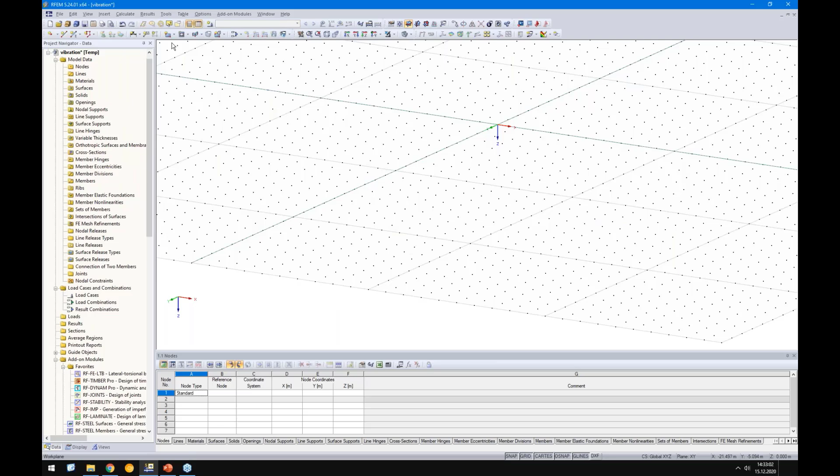Let's start with the timber. I will create a new material. Watch out, they used 10,000 Newton per square millimeter, not 11,000 as C24, but in this case we can simply use a C22, which should have 10,000 Newton per square millimeter.

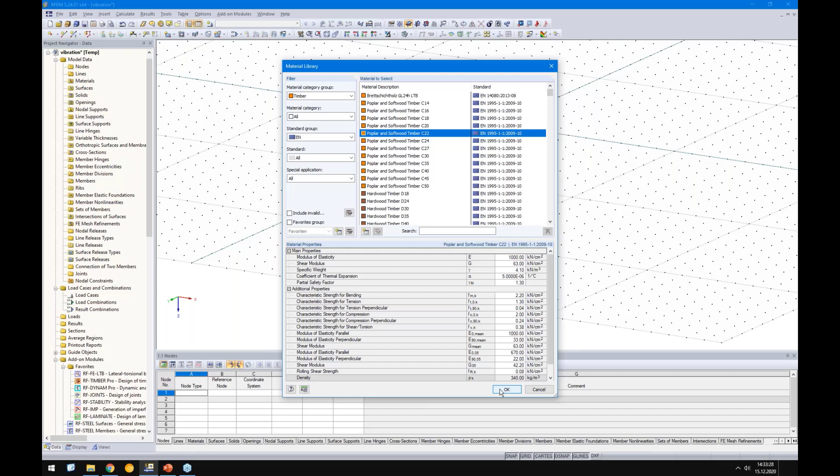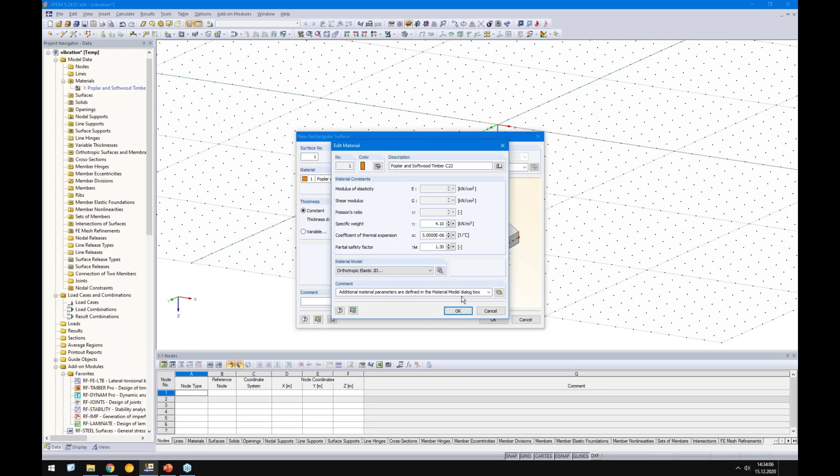Then I click OK, and we have the height of the timber is 200 millimeters and the concrete is 100 millimeters. So I will enter 200 millimeters, and of course that's still an orthotropic surface, otherwise I will get an error message during the analysis. You see here we have the X direction with a strong E-modulus and the weak one in the Y direction. In this example we can directly set it to 0, because in the hand calculation from the source, no stiffness was considered from timber. There's a tiny stiffness, but of course not much. All right, so it's an orthotropic surface with 200 millimeters.

So it has 8 by 12 meters. Let's double check, 12 meters and 8 meters. Then I will copy this surface.

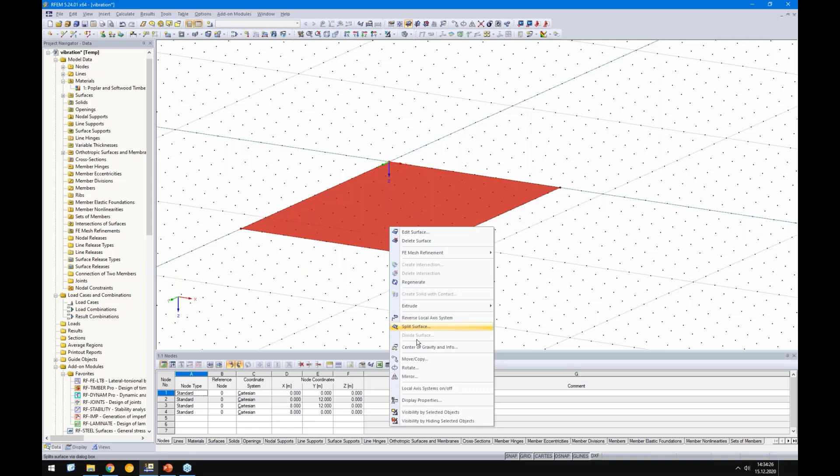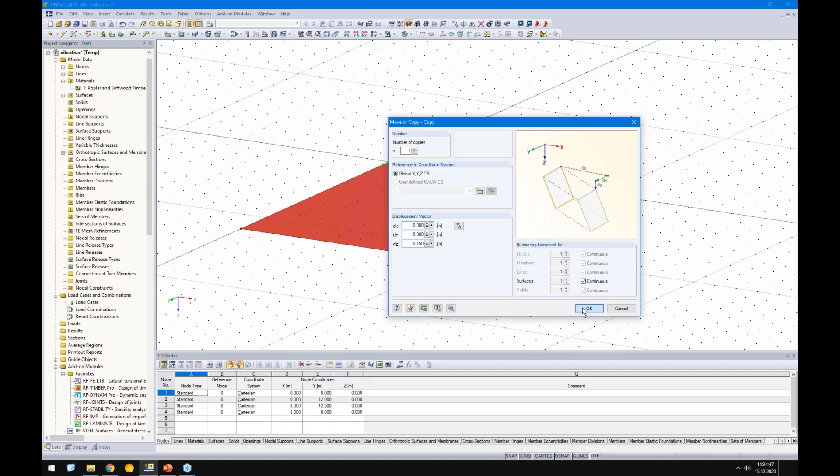And I will create a concrete. So the thickness was 20 centimeters and 10 centimeters, meaning we need to lift up this concrete surface by 0.15 meters from center to center.

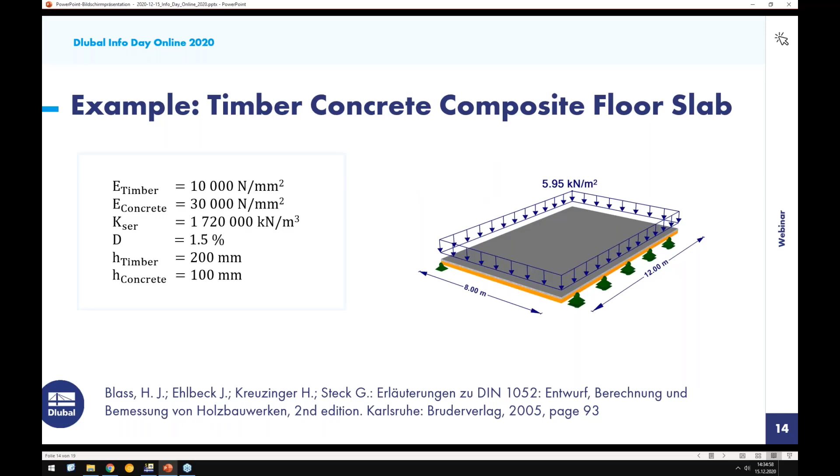So we need a new material here. Let's check, they used 30,000 Newton per square millimeter, so we should use a concrete with 30,000, too, it's a C20/25. But it has only 100 millimeters, of course, so we will switch this to 100 millimeters.

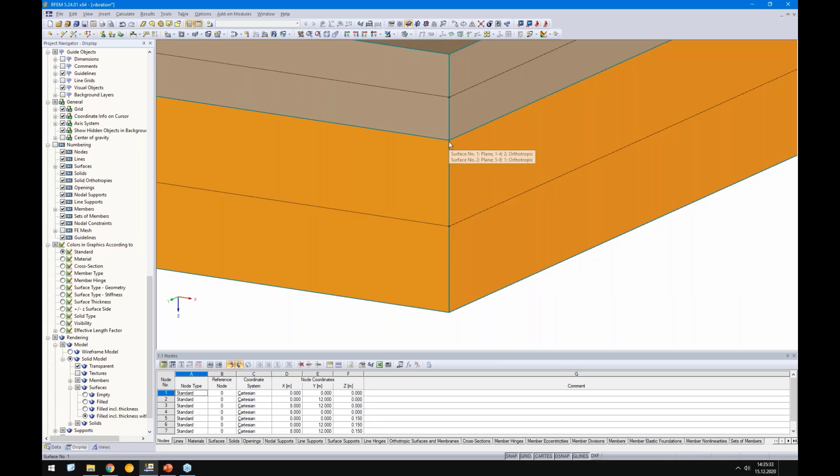Afterwards, let's check if everything is correct. We activate the thickness for the surfaces. When we zoom in, we see directly, okay, so this is the concrete from here till here, and from here till here the timber, which looks fine.

So what we need to do now is connect the concrete slab with the timber slab. What possibilities do we have - I will show two examples. So we have two ways to do this. The first way, I start with a contact solid, so I select these two surfaces and say create solid with contact.

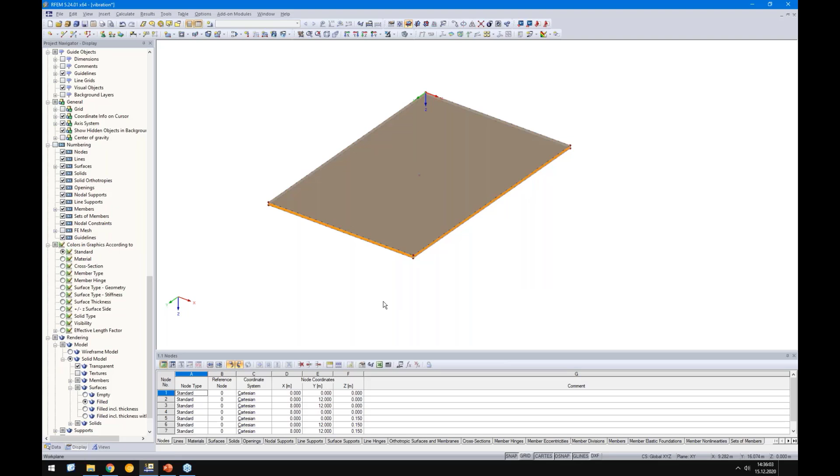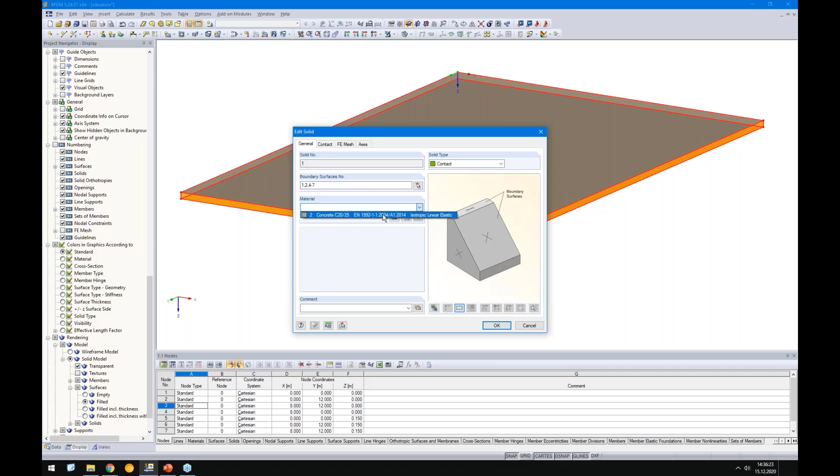You see directly we get some boundary surfaces. These boundary surfaces have zero stiffness because they get the stiffness from the contact solid. We will define this contact solid, and we select the contact - it's the contact surfaces, so surface 1 and surface 2.

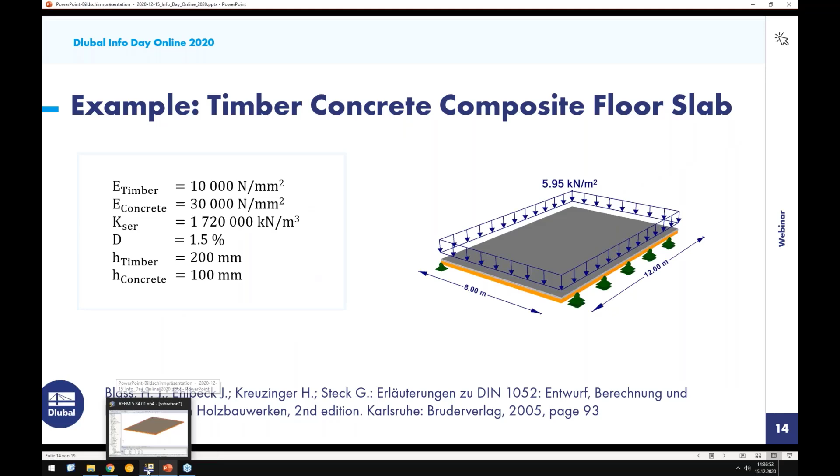Perpendicular to the surface, we want to consider full force transmission, and here parallel to the layers, we want to consider this elastic behavior, and the spring was 1720 meganewton per cubic meter, and this value we will enter here. So we are in kilonewton, so I will add 3 zeros. Okay, that's it so far.

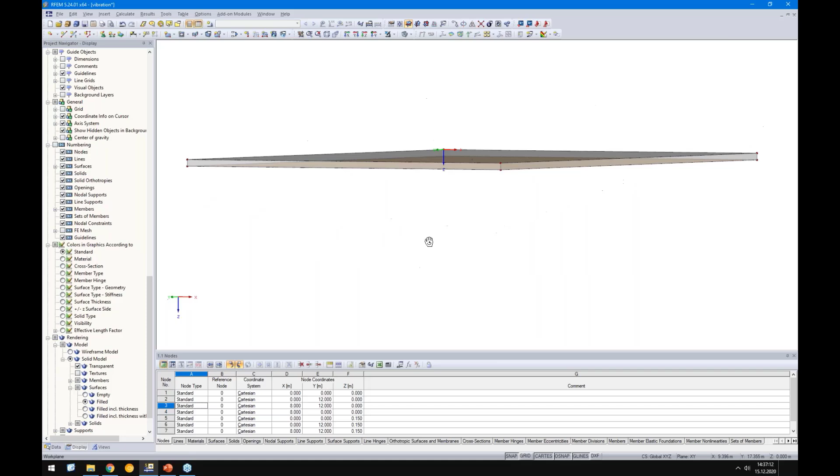Let's double check. On top we have this concrete - maybe better to select standard here. And on the bottom side, we should have this timber. Okay, good so far?

We will support the slab. It's simply supported on this side and on this side. In the X direction, I will also consider a tiny spring to keep it stable, otherwise there is no support in the XY plane. With the springs I fix this structure, but since we do not use any load in the XY plane, we use only the mass in the Z direction, perpendicular to the surfaces.

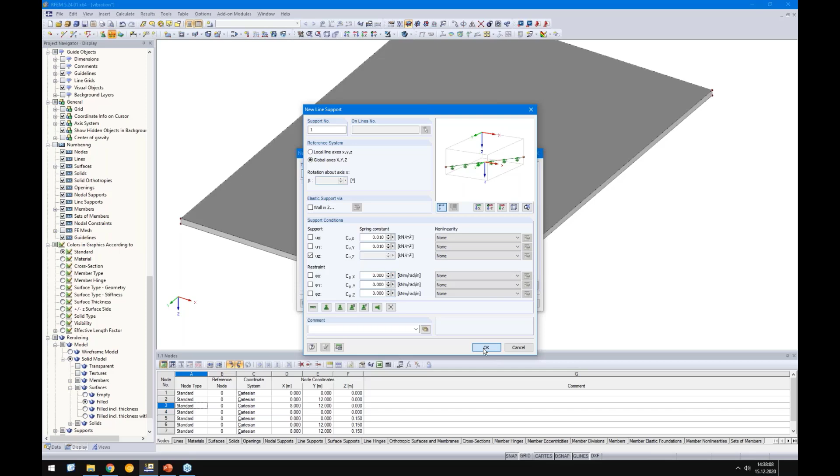So this line and this line. I will add a load case, load case 1, that should be the mass. The self-weight is already included in this 5.95 kilonewton per square meter, so I define here directly the force of 5.95 kilonewton per square meter.

And let's take care of the FE mesh size. So maybe we will switch to 0.2 meters, which should be absolutely fine for this example. All right, that's one option. I will show you the second one.

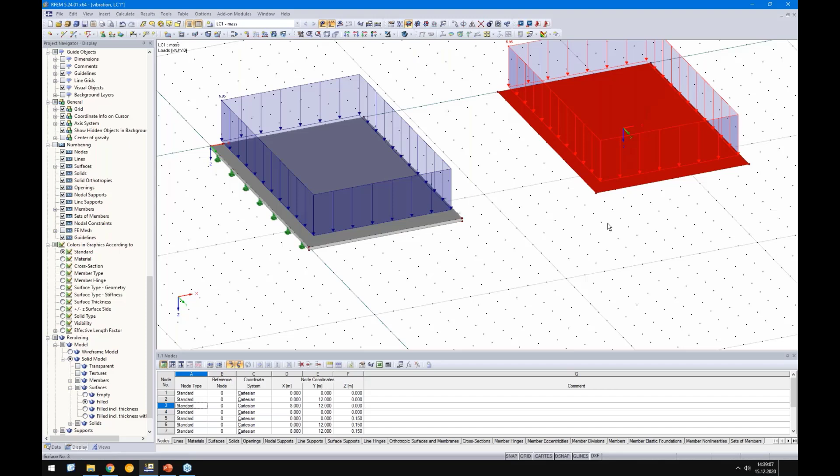For the second one, I will copy the surface via drag and drop, and in this case I will use the element surface releases. I will create a new surface release. I want to release another surface. So you see here how it works: we have one solid or surface and another solid or surface, and in between there should be this hinge information, this release information.

Here you see we have an advantage because we can control both directions independently. With the contact solid, there is only one direction, so X and Y are always the same value. Here we can distinguish, but to compare the results, I will use the same as for the contact solid.

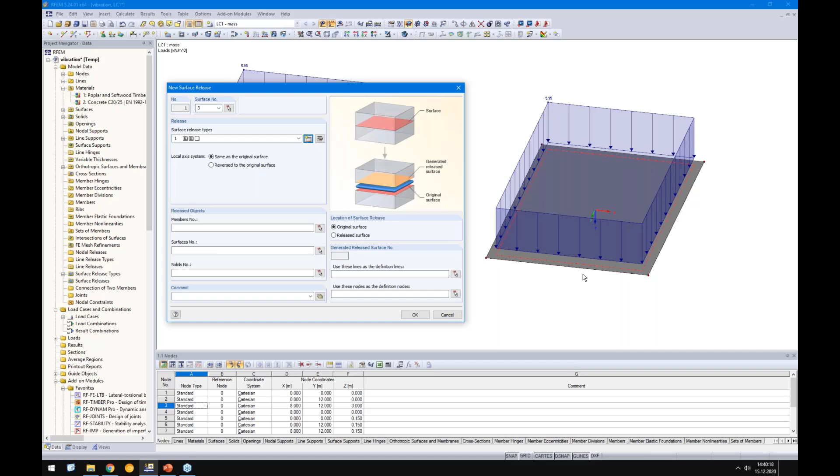I can release the object here, the same as I did with the line releases, but there is no element yet to release, though it doesn't matter. I just click the OK button, and when I click on the surface, you see there is already a surface, and this surface I will add. It's a zero surface, but no big deal.

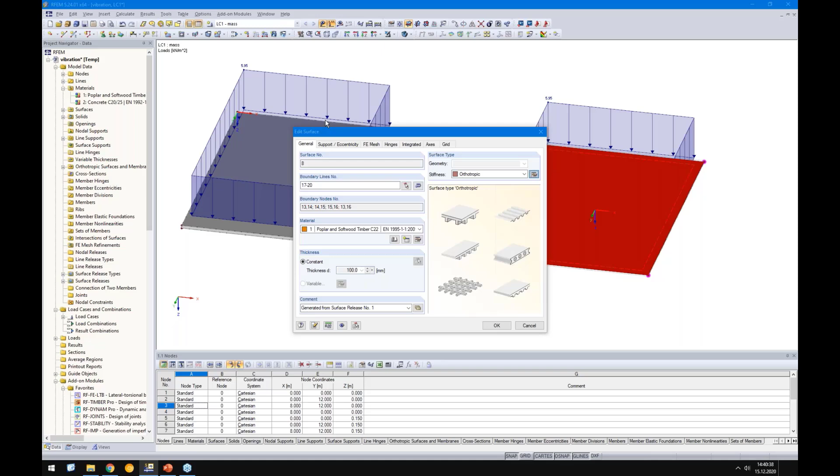I will switch over to orthotropic and assign this timber surface. I just need to adjust the thickness of the timber by 100 millimeters. And now I need to set this concrete surface, or create an eccentricity for this concrete surface by minus 150 millimeters.

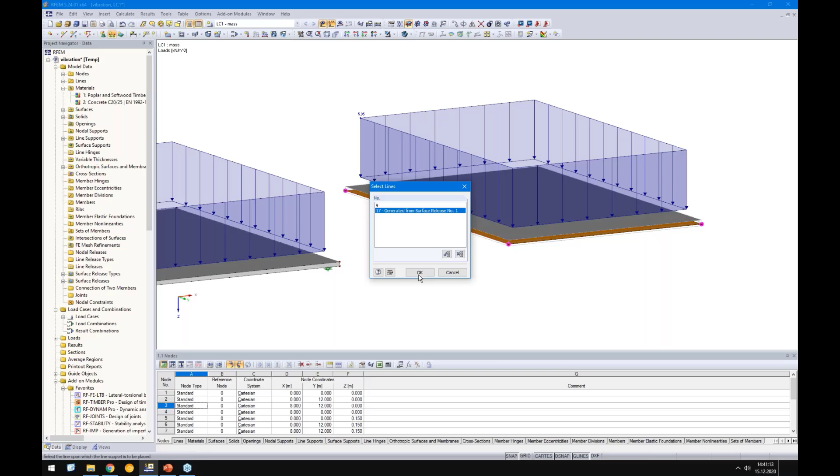Now I have the same model - oh, not the same, I forgot the supports, so on the left side and also on the right side. Okay, let's run the analysis for load case 1.

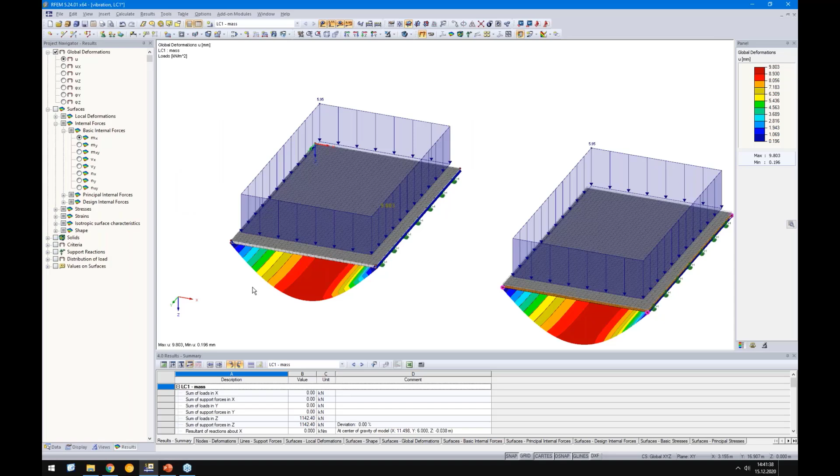Meanwhile we check what is the solution from the analytical equation. From the example it is 9.5 millimeters. Let's go back and see the result. It's good, but still a bit away from the 9.5 millimeters. But you can see it here in the center, we already have the 9.5 millimeters, but not here on the outside.

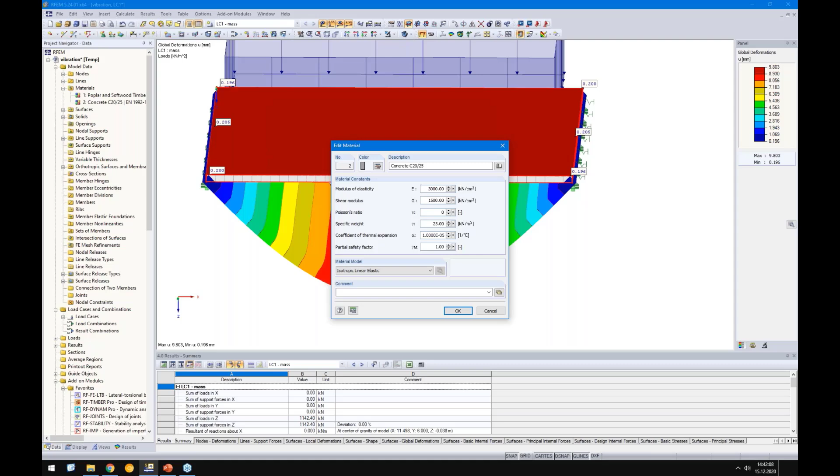This comes because of the concrete and the Poisson effect. Of course, in the hand calculation or analytical equations, this Poisson effect is not considered, so I will neglect it here too. I set it to 0.

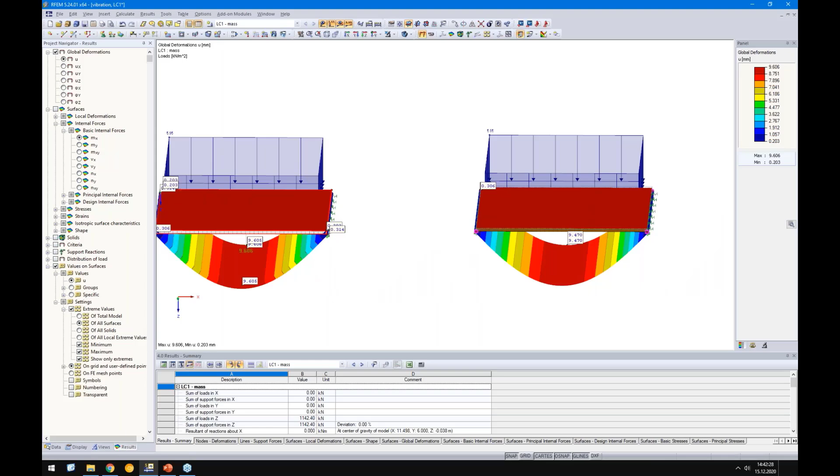Start again. So we had 9.5 millimeters, we have 9.6 now here, and we have 9.47 on the right side with the surface releases. So it fits perfectly with the result from the analytical equation.

So it's bigger than 6 millimeters, and therefore the eigenfrequency of this structure is lower than 7.2 hertz. This was the limit in the old German timber code, and the new limit in the Eurocode is 8 hertz. But there is always a relation between the deformation and the eigenfrequency.

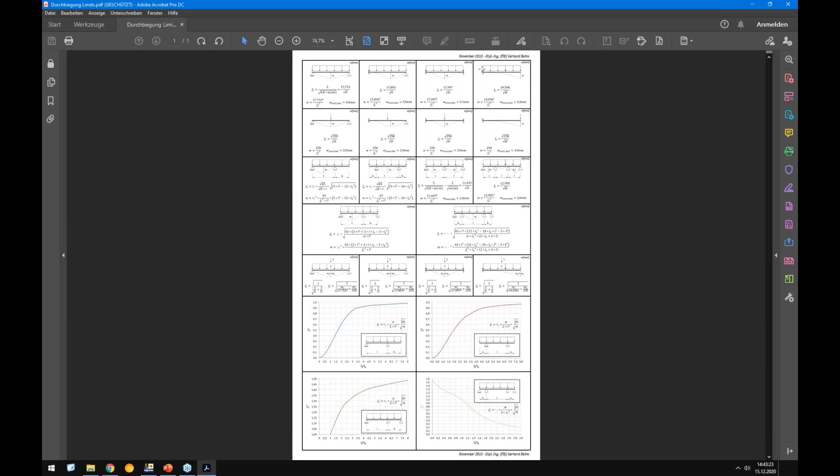I did a small article about this issue, explained here. When you go to the knowledge base on our website, you will find this information, and inside there is a PDF file I created a few years ago, already in 2013. Here you can see the relation for a simple one-span beam, this equation, which maybe is well known from literature.

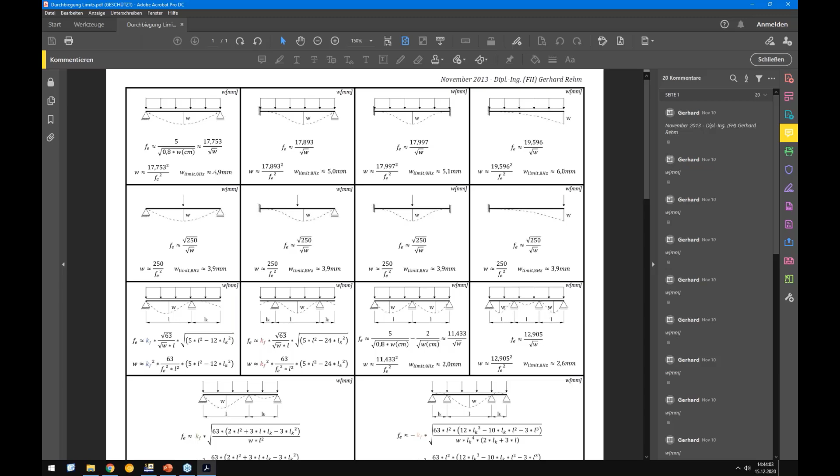So for Eurocode 8, Eurocode 5, and the limit of 8 hertz, we have around 4.9 millimeter deformation. If the deformation of this one span beam is lower than 4.9 millimeter, the eigenfrequency is automatically higher than 8 hertz, or exactly 8 hertz. And in case the deformation is bigger than 4.9 millimeter for a one span beam, the eigenfrequency is smaller than 8 hertz. That's just a simplified rule.

Okay, good. Then let's go further. They prove the natural frequency, so in this case it should be 5.87 hertz. It's really low, and they write here that some additional design requirements are necessary, the same as in Eurocode 5, but of course Eurocode 5 does not provide any information when the frequency is lower than 8 hertz. There are some literature and approaches on how to deal with it, for example from this code or from the source I mentioned, or from other literature.

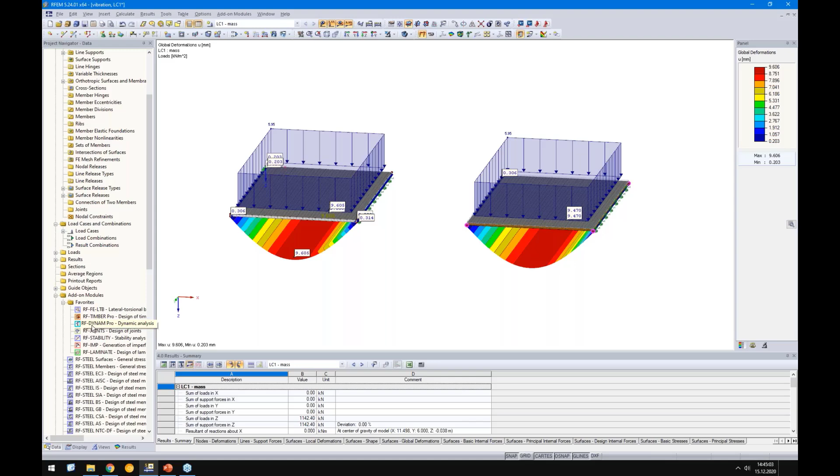Okay, so let's check the eigenfrequency. We will check it not directly in RFEM, or we cannot check it directly in RFEM. We need an add-on module called RF Dynam Pro. This Dynam Pro add-on module is based on forced vibrations or equivalent loads, especially for seismic design and so on. In our case, I just want to use the first sub module. There are 4 sub modules inside this global Dynam Pro module. I use this natural vibration module, and I go here.

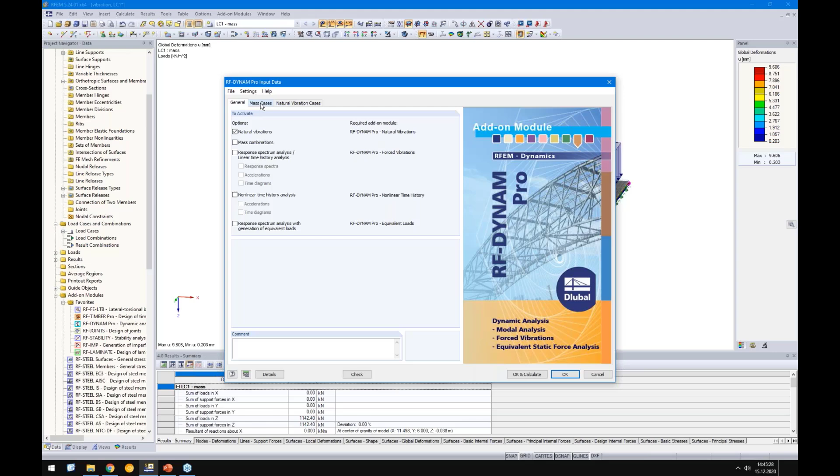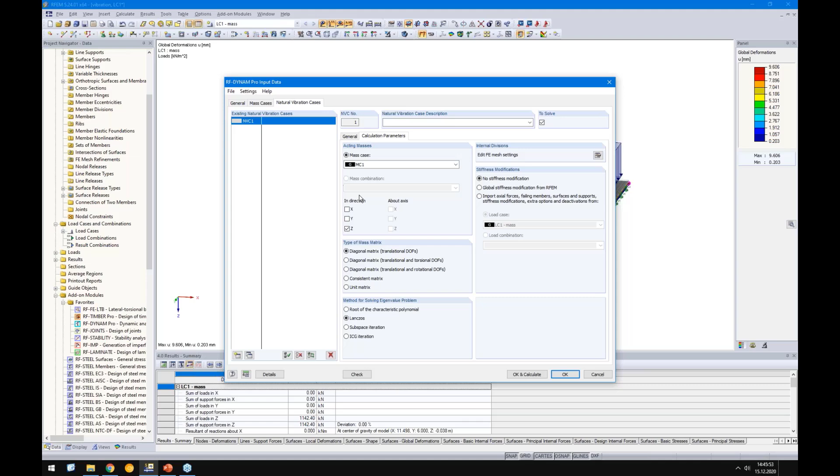I will assign my mass. In this case, I select to use the mass from load case 1. In the next tab, I can select how many eigenvalues I want to calculate. Of course, I'm mostly interested in the first one. And here I say please do not accelerate or consider the masses in X and Y direction, since I have no support here. I'm only interested in the Z direction. Okay, then let's calculate the frequency.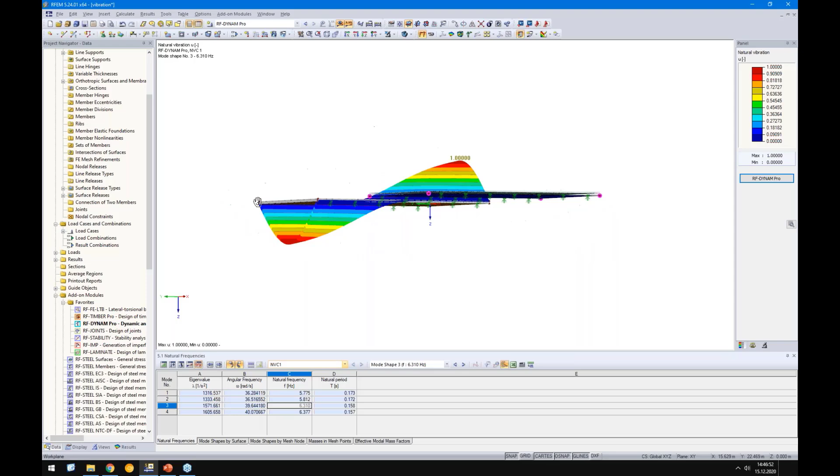For example, the third mode, that's some torsional mode, but I'm not interested in this mode now. I will check this one here. So eigenshape 5.7, let's say 5.8 hertz. And here in this literature, it's 5.87 hertz.

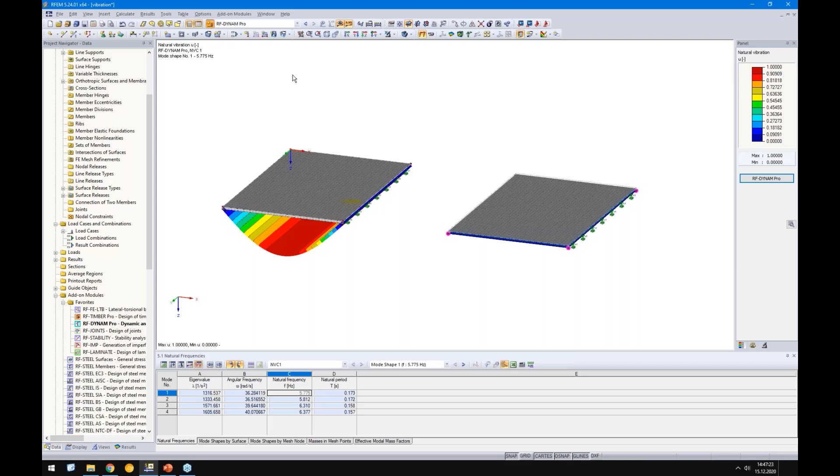Which is fine. Then we need to check the stiffness under a man load of 1 kilonewton. It's actually the same as in Eurocode 5. We will do this, so I will create a new load case, and I call it unit load.

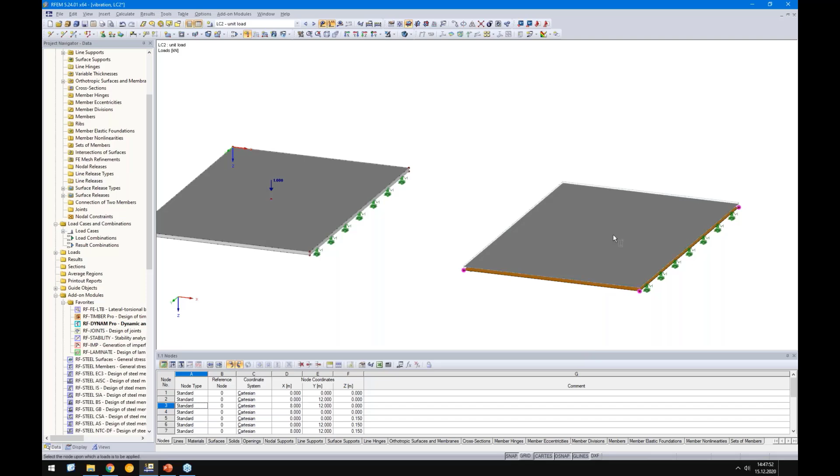And I will apply this load exactly in the middle. And the same here. And I add this 1 kilonewton on this generated node. All right, so we run the analysis. And we see a deformation of around 0.07 millimeters. Compared to the literature, it's a bit smaller.

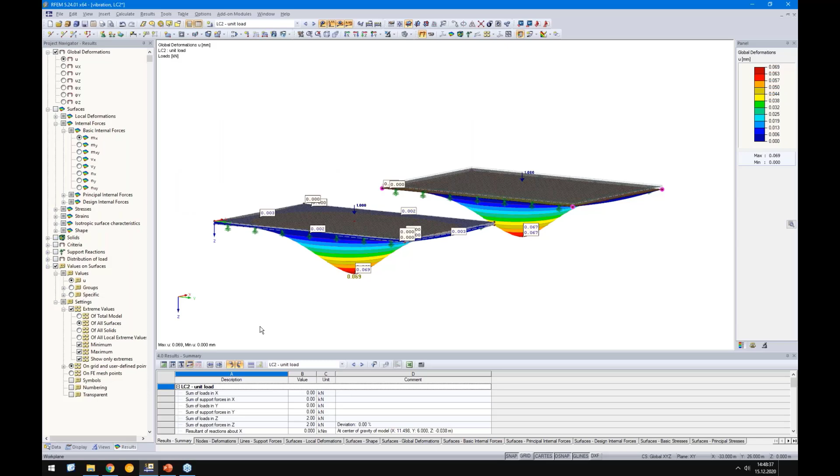The reason is because they calculate the stiffness of this floor with an effective width. They do not consider the whole width of 12 meters. The effective width was, I guess, 3.8 meters in this example. So if you would reduce the width of the floor to 3.8 meter and distribute the node load to a line load, you will get exactly the 0.083 millimeters. So in this case, this is a bit too unconservative, but it's not far away, so it's okay.

Okay, and the next step was the acceleration design. So because our frequency is smaller than 8 hertz, we need to check the acceleration.

Empirical investigations in the 80s offered the result that vibration with frequency lower than 8 hertz is dependent on the acceleration, and with higher than 8 hertz it's dependent on the velocity. In this case, we are smaller than 8 hertz, so we will check the acceleration.

There are tests showing that this velocity check, what is done in the Eurocode, is actually not really design-giving anymore, because a typical timber floor is, for acoustic reasons, already really heavy. So the velocity check mostly is never controlling and not important. But the acceleration needs to be checked.

Let's check how we do it by hand calculations or by some analytical equations. Maybe you know these equations already, or you have seen them in literature. We have the acceleration A, and we have a force divided by some mass. So this is the force here, and this is the mass, and this 2 times D. D is the damping. This comes from the magnification function.

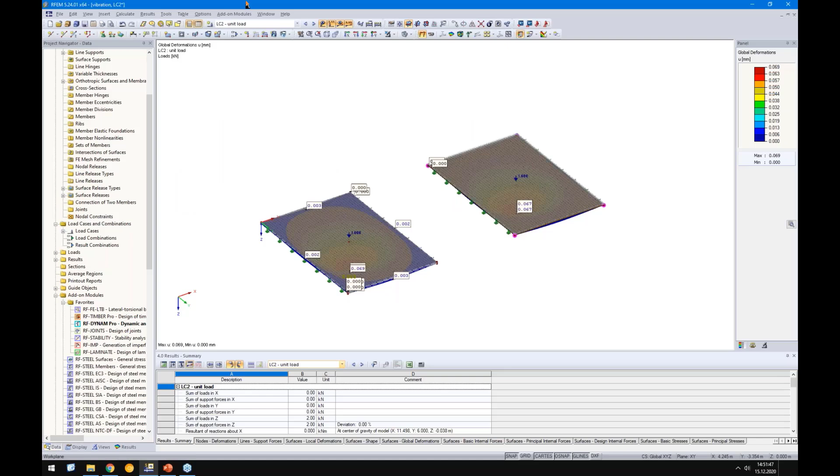Exactly this I want to consider, I want to define in our RF-DYNAM Pro add-on module. All right, let's go back, or before we go back, maybe we can switch to RF-DYNAM Pro. No, we cannot.

We need to restart the analysis again because I want to copy already the natural frequency, because I need it in the module. In this case, I need the angular frequency, omega. So I copy the first one.

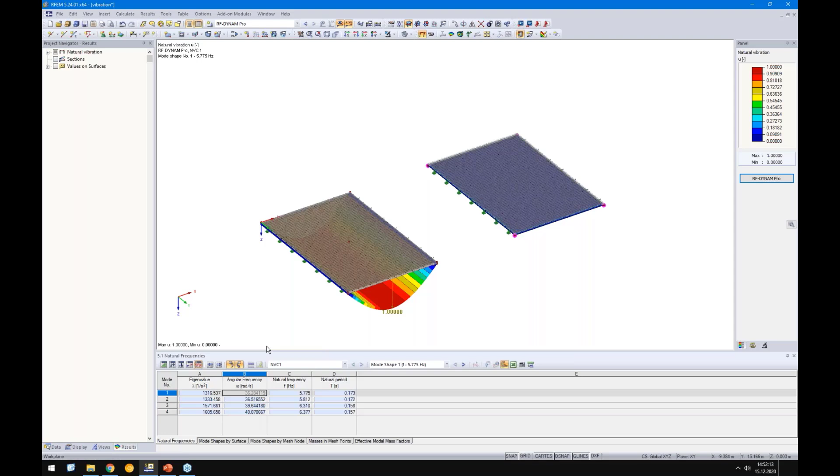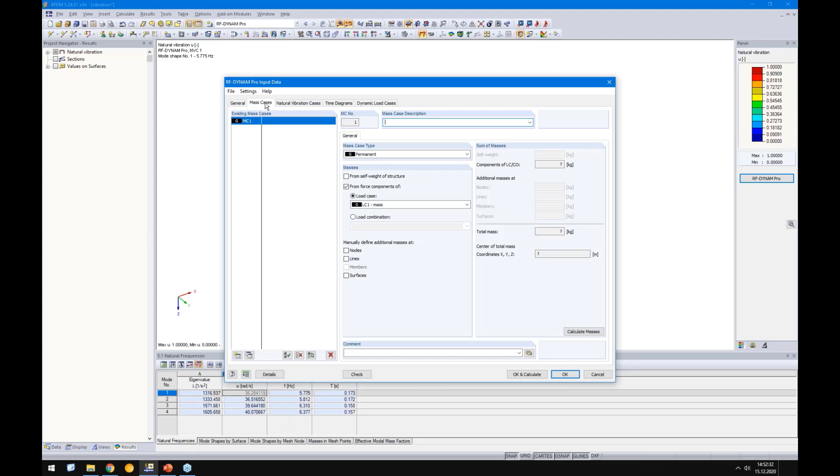And then let's go to RF-DYNAM Pro. In this case, I need to activate this response spectrum analysis option, or in this case, it's actually a time history analysis with a time diagram. So I can skip the first two tabs because they are not important for it. And here I need to define this function, and I copied already this omega, and this omega I have to enter here. So this is actually a resonance check.

So do not enter the angular frequency of a person. When you walk around, you walk with around 2 till 2.45 hertz, and 2 times pi by the frequency is the angular frequency, but do not use the angular frequency from the person. What you need to do, that's why it's called resonance check, is enter exactly the angular frequency from the first eigenshape to get the resonance.

Okay, the shift should be 0, and multiplier I write down just a 1 for now, and you see this periodic function, which is fine.

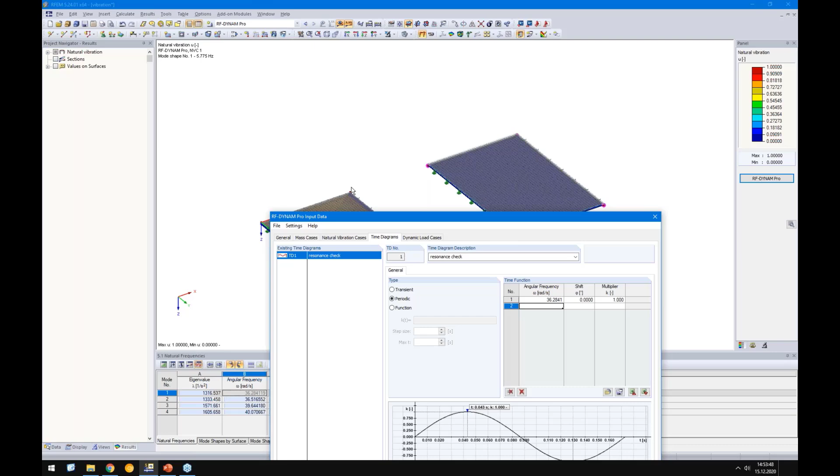But we need to consider the force, the correct force. We remember in load case 2, I have defined this unit load of 1 kilonewton. So when we check the force here, which is on the upper side, we have 0.1 by 700 multiplied by 0.4 equals a factor of 0.028. Let me double check this in my notes. Yes, it's correct. So when we multiply this factor by this 1 kilonewton, we get exactly the same force as it's written here. That's actually all for this tab.

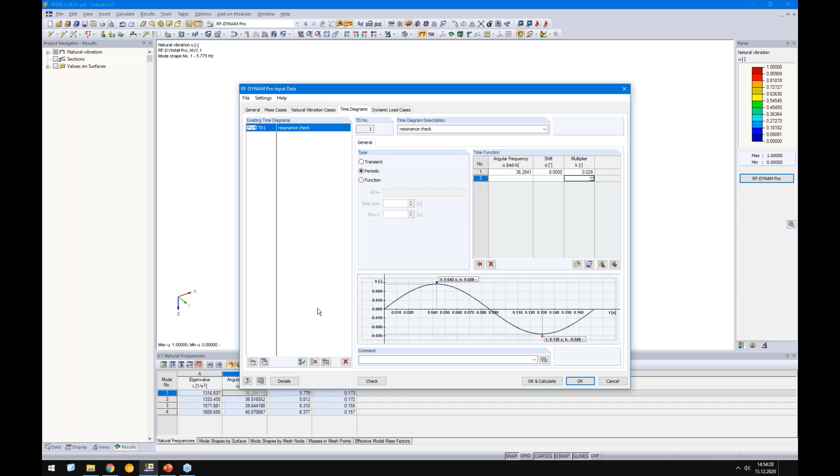Then we switch over to the dynamic load case. We will do a linear modal analysis. And here I can connect this unit load, this 1 kilonewton, with this time diagram. I can use this factor here too and use a factor of 1 here. That's also possible, but it's okay now.

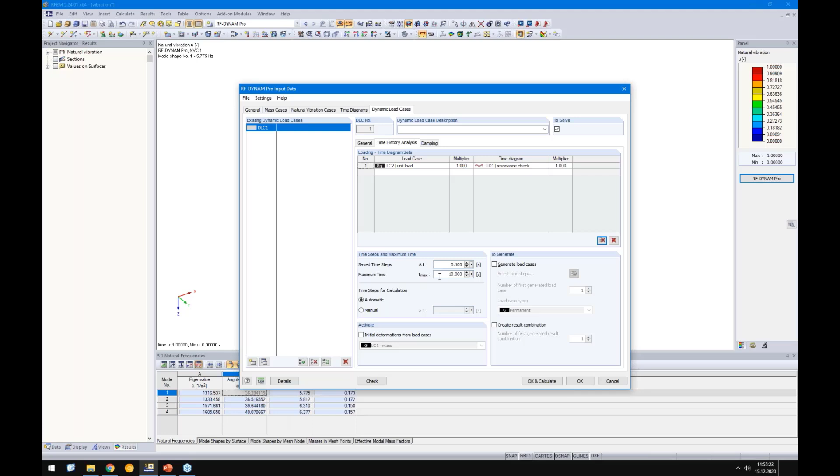Very important are the time steps. They should be small enough to cover all important load steps or time steps, and long enough to cover the resonance. So you need to play a bit around with it. Start with one value and then see in the results if resonance occurs already or not.

Okay, so at least we need to define the damping, and it was given by 0.015. I guess that's all.

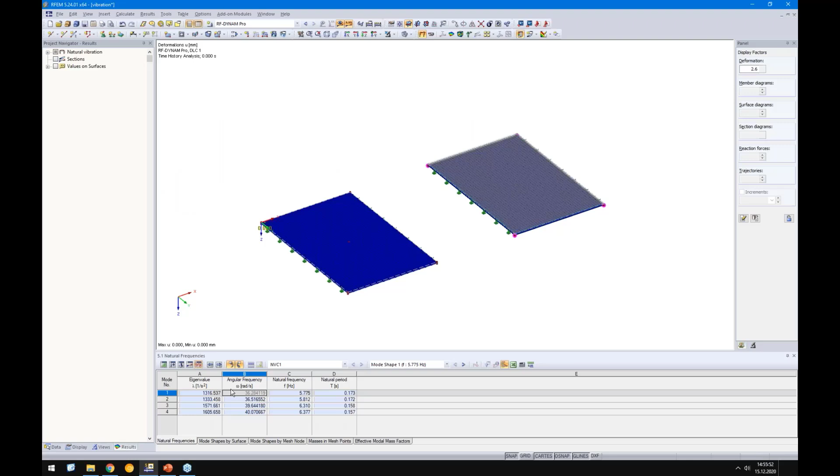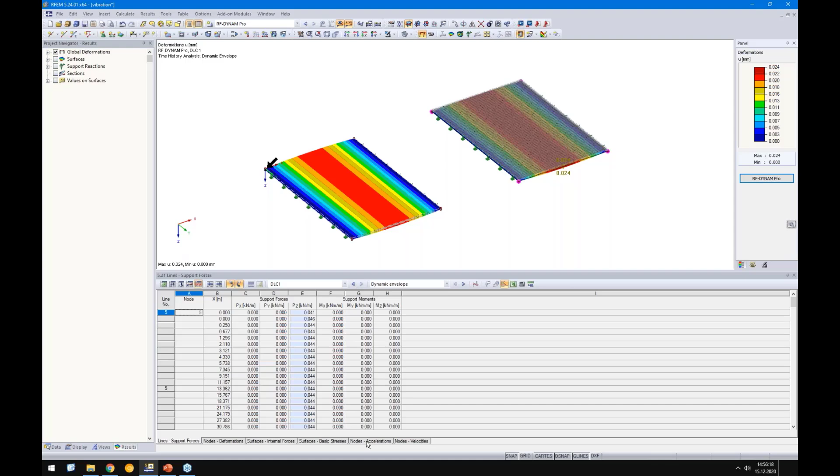Now we get the result from the dynamic load case. Here we get the result from each time step till 10 seconds, but I'm interested in this dynamic envelope, which considers all of these time steps. Okay, here I will switch to nodes accelerations, so we know this node is number 17 and this node is number 18.

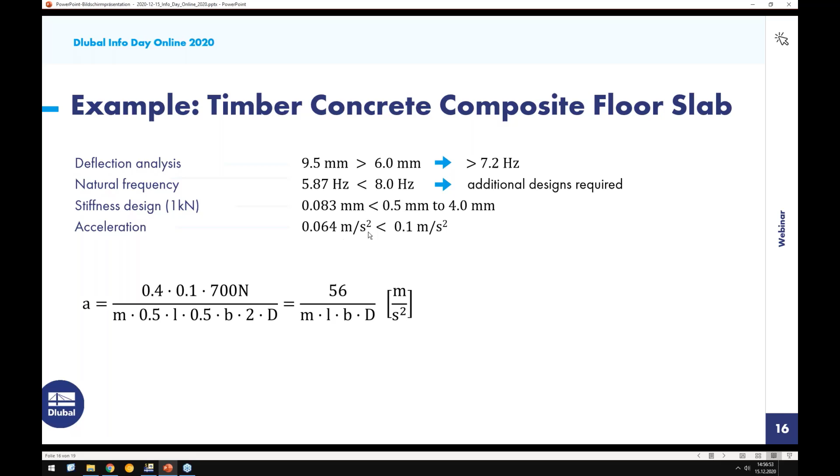Okay, so in this example we get 0. So yeah, it's not exactly the same, but it's okay. We get 0.032 when we compare it with the result from the analytical equation. We get only 50% of it, exactly 50%.

When we think about this equation here on the bottom, what they have used in this example, they consider a four-sided supported slab. As you see, they estimate that only half of it goes into these supports and half into those supports. What we need for our example is actually this one, because we use it as a one-span beam. So they have mixed it up a bit in this literature. It was a bit confusing at first, but I figured this out at the end.

If you reduce this 0.5 by b, so if you neglect the 0.5 by multiplying the whole equation with 0.5, you also multiply this value with 0.5, you will get exactly the 0.032 meters per square second.

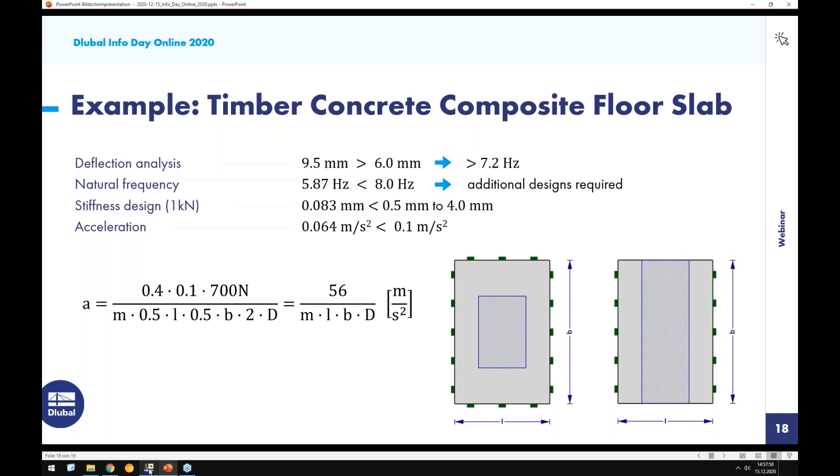So yeah, this is the way to check it. And of course, you can add the supports here and here, so support it on four sides and run the analysis, copy the angular frequency again, insert it in the time course monitor, and then you will get exactly this 0.064 meters per square second.

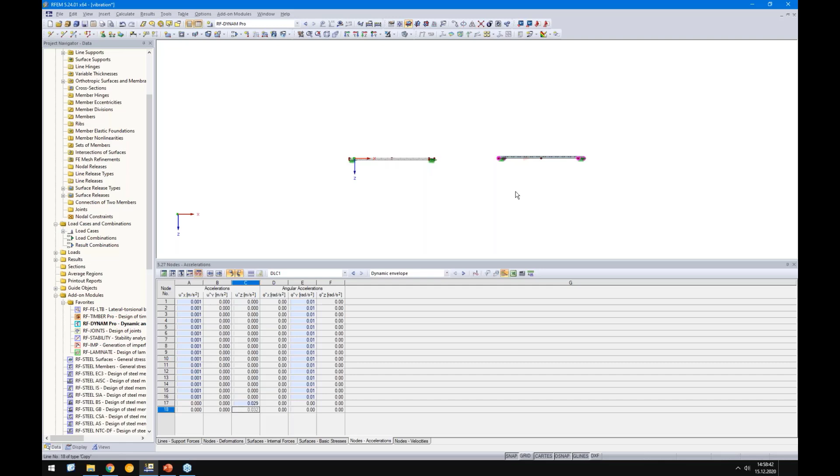But yeah, this is your homework. For me, that's all from today, and I hope everything was clear with this approach and with defining the contact solids and the surface releases. It's a mighty feature.

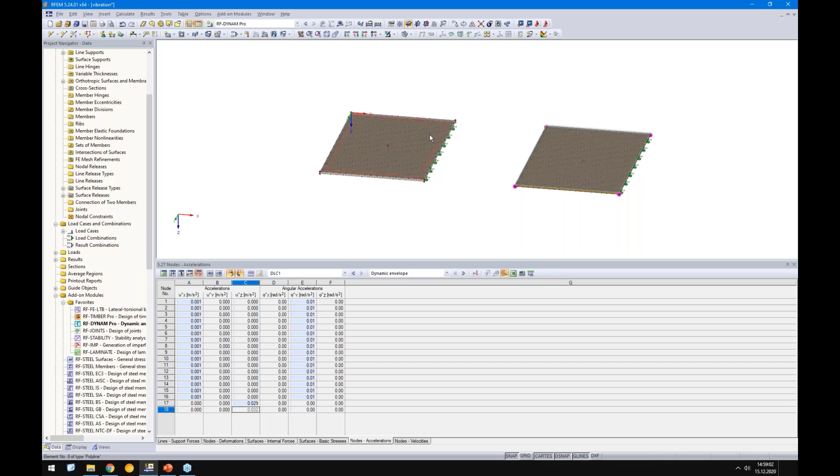Of course, for this slab, maybe I would not use this Dynam Pro add-on module when there are some easy, simple analytical equations where you are much quicker. But in case of some complicated structure, please consider you have a downstand beam here, so you have no rigid support, you have a semi-rigid support, and then it's getting really complicated to get these accelerations with analytical equations.

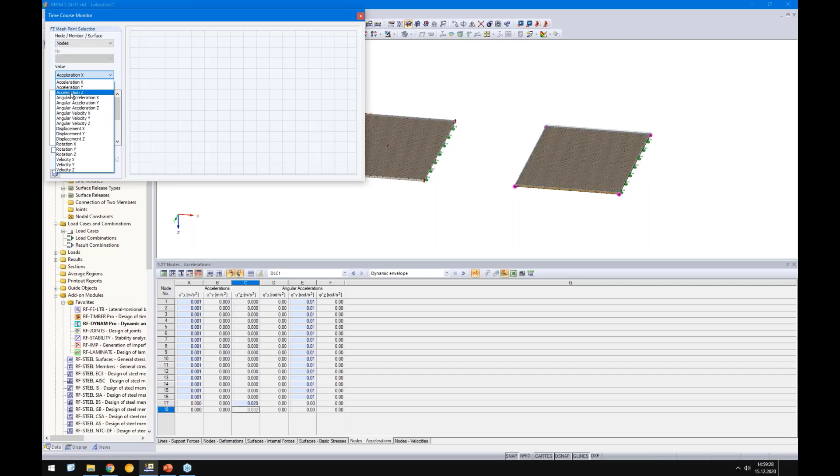Maybe one thing I want to show you is this time course monitor. I want to check the acceleration in Z direction for node number 18.

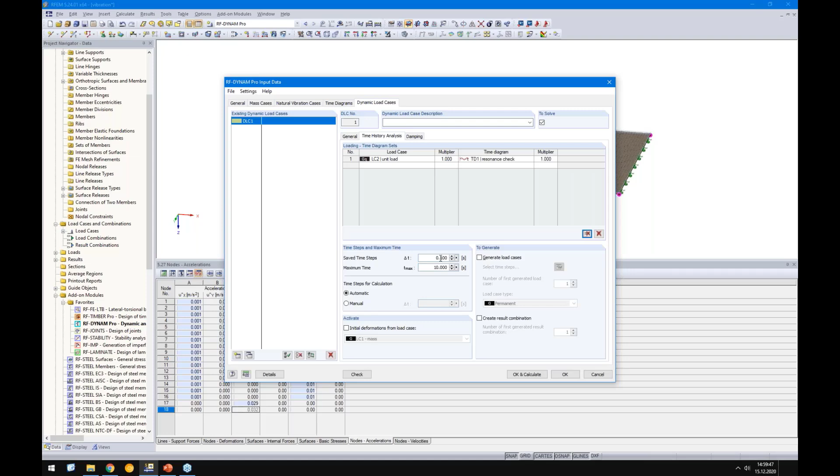Okay, maybe you see here, maybe the time step was not small enough. Maybe we should add here another 0. I will do this quickly to get a proper result. We saw that the function was not really homogeneous, there were a lot of peaks and so on. I increase the increments here, and then let's check.

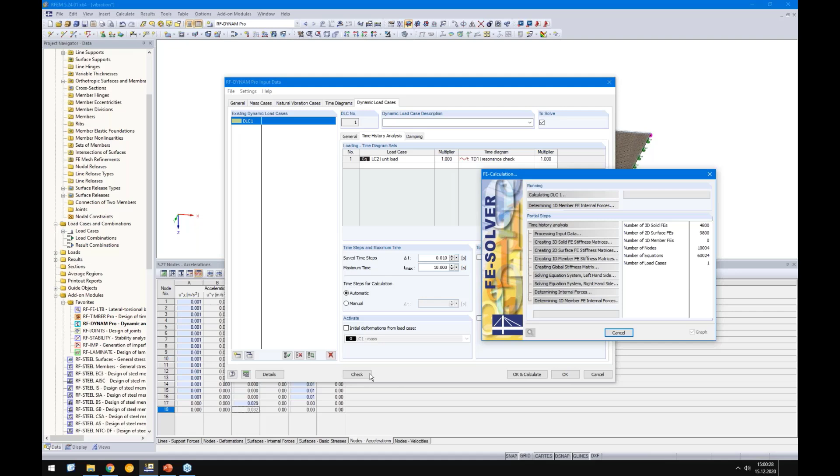Of course, the more time steps you use, the longer the analysis takes, but we'll see the result. Still loading.

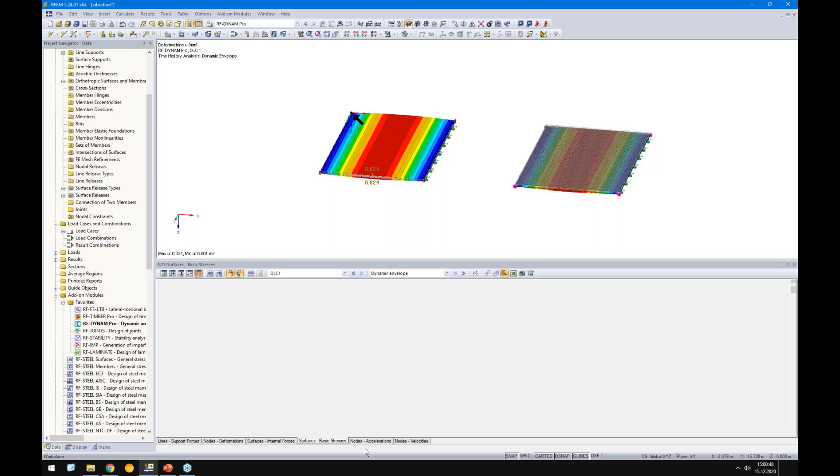Okay, so you see it was the same result. It does not change, only for the contact solid. Now we get the same results for both because of smaller time steps. And when we check this time course monitor, hopefully we get a better curve.

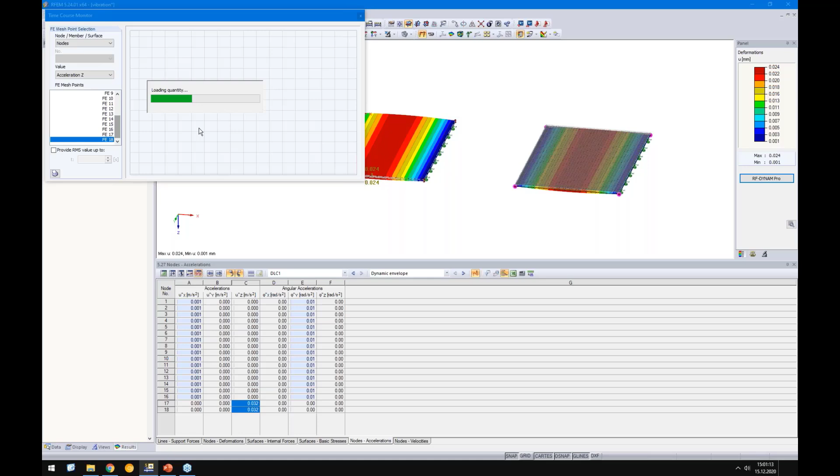Yeah, looks good so far. So you see here how this resonance starts, and the peak is here, and the next value is already 0.01. So yeah, it's a minute, so this value here is already smaller, so it will fall down here. So resonance is here at around 9.95 seconds, so I catch it really good with the 10 seconds.

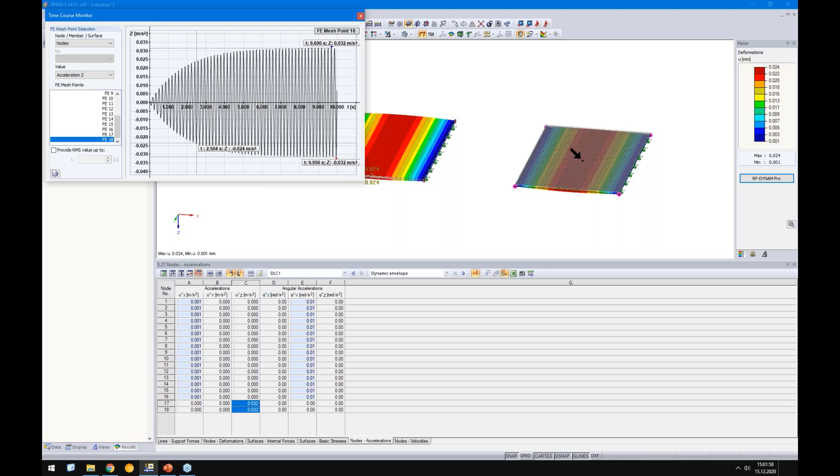Okay, so you can evaluate all the results from velocity, from acceleration inside here, this time course monitor. Okay, good, so that was it from my side. I will give back to Andreas, and thank you very much.